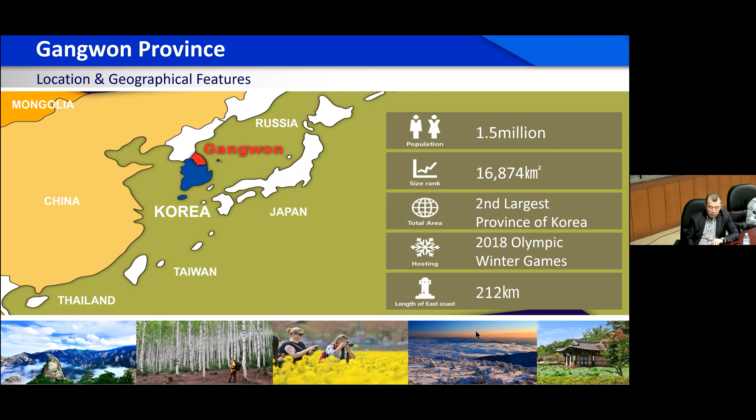Gangwon province is located in the central east region of the Korean Peninsula, where the Taebaek Mountains, which correspond to the spine of Korea, pass by, and has a long east coast. It has beautiful nature surrounded by mountains, forests, and beaches. Gangwon Technopark is a vital innovation hub in close cooperation with local governments. It aims to support local businesses and to nurture the future growth engine industry in Gangwon province, and in turn to increase employment. The Energy and Disaster Prevention Center in particular is located in this area, Samcheok, and performs hydrogen-related tasks.

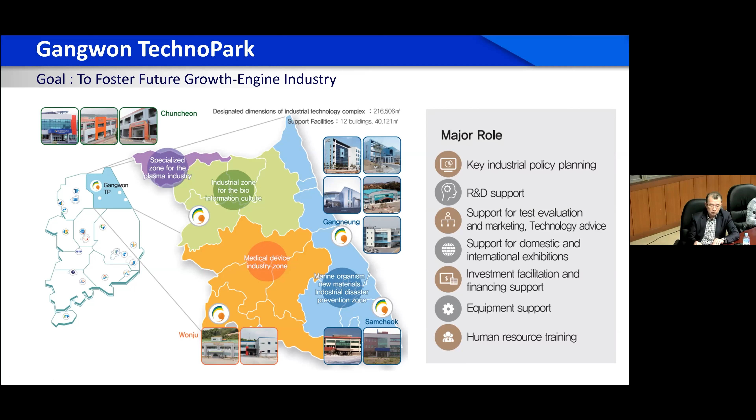First, let's talk about the regulation-free special zone. From July 2019, the Korean government has been conducting an experiment of relaxing regulation to boost new industries while minimizing the risk of side effects. Gangwon was selected as a regulation-free special zone for liquefied hydrogen in July 2020 and conducts several projects regarding liquefied hydrogen.

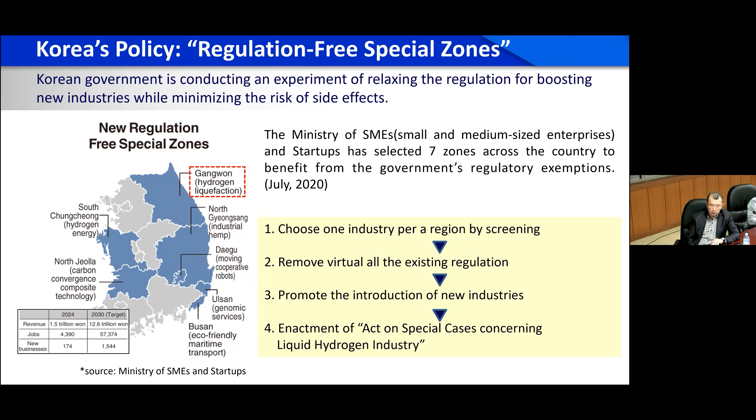In a normal environment, hydrogen exists as a gas. Then why do we use liquefied hydrogen? Because gaseous hydrogen occupies quite a large volume, it has to be compressed at very high pressure, as high as 850 bar, to decrease the volume to make it suitable for passenger vehicles, namely the hydrogen car or fuel cell electric vehicle. Here is where liquid hydrogen, or liquefied hydrogen, comes in handy. The pressure of liquefied hydrogen is only 1 bar, but the temperature is extremely low, minus 253 degrees Celsius, or 20 Kelvin. In terms of pressure, liquefied hydrogen is much safer than gas, and it can store much more mass in the same volume.

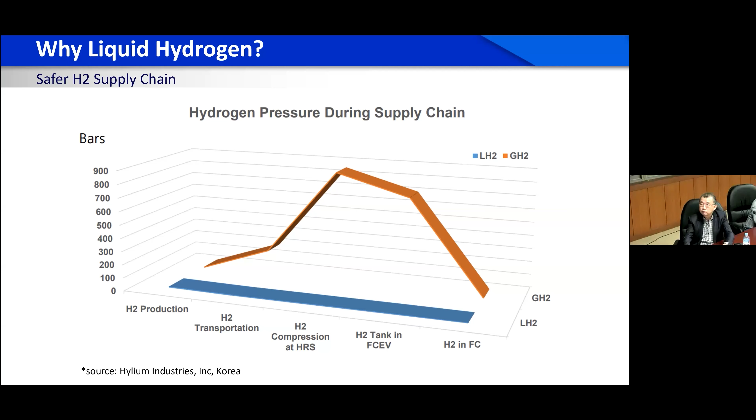How did Gangwon, or Samcheok to be more specific, become the hub of the liquefied hydrogen industry? Besides the strong will of the governor, Gangwon, especially Samcheok, has one of the major liquefied natural gas terminals in Korea. So Samcheok has a great advantage in reducing liquefaction cost by leveraging the cold energy produced by the existing LNG infrastructure. The main issue is how much power consumption can be reduced in hydrogen liquefaction plants on a commercial scale by LNG pre-cooling.

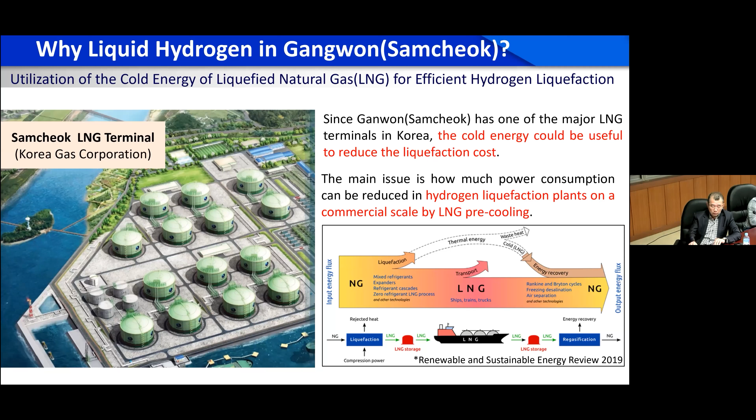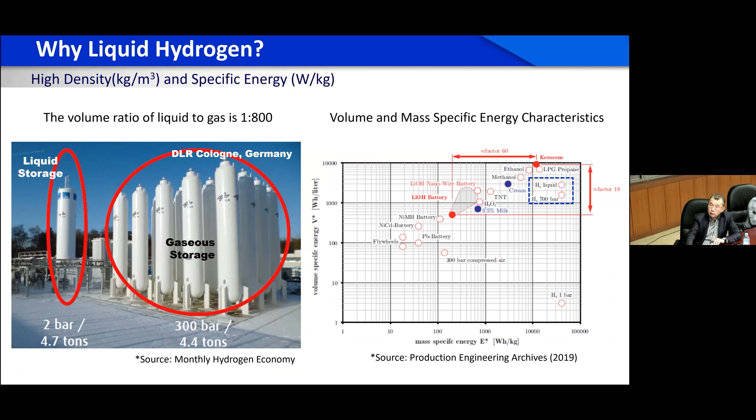As you may know, liquefied hydrogen has several advantages compared to gas hydrogen. The biggest advantage is that the specific volume of liquefied hydrogen is only 1/800th of the specific volume of gas hydrogen. This means that the area of the installation site, or charging station, or fueling station, can be reduced by 1/10, making it easier to build charging stations in downtown or city center areas. For fuel cell electric vehicles, the mileage can be increased by 10 times compared to gas hydrogen with the same storage volume. Therefore, storage and transportation costs can be reduced dramatically.

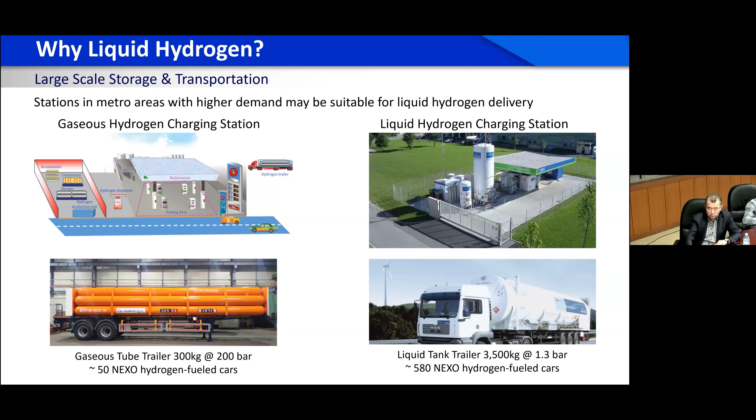Let me explain about the Liquefied Hydrogen Regulation-Free Special Zone project. This project is funded by central and local governments. The purpose of this project is to promote the liquefied hydrogen-related industries which currently lack relevant laws and safety standards.

To do business in this special zone, and only within this zone, companies are allowed to do business of production, storage, transportation, and utilization of liquefied hydrogen. Final goals of this project are to create a full cycle value chain that can produce, transport, and utilize liquefied hydrogen and apply it to mobility, ships, drones, and UAM. The most important point of this project is to demonstrate proof of commercialization of liquefied hydrogen.

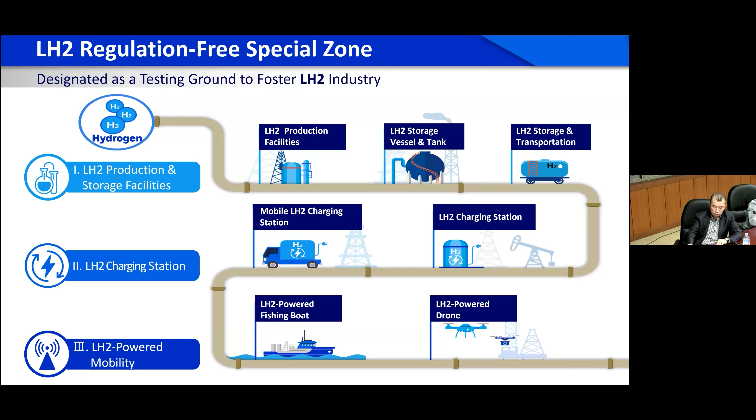Task one is commercialization or commercial demonstration of parts for liquefied hydrogen production and storage products. First detailed task is demonstration of production of pipes and valves for liquefied hydrogen. Several kinds of valves, for example, safety relief valve and check valve, and double tube for extremely low temperature applications are under development. Second detailed task is to build liquefied hydrogen containers and tanks with capacity up to 1,000 kilograms. The third detailed task is to develop liquefied hydrogen tank trailer or tanker lorry for long distance transportation and loading and unloading.

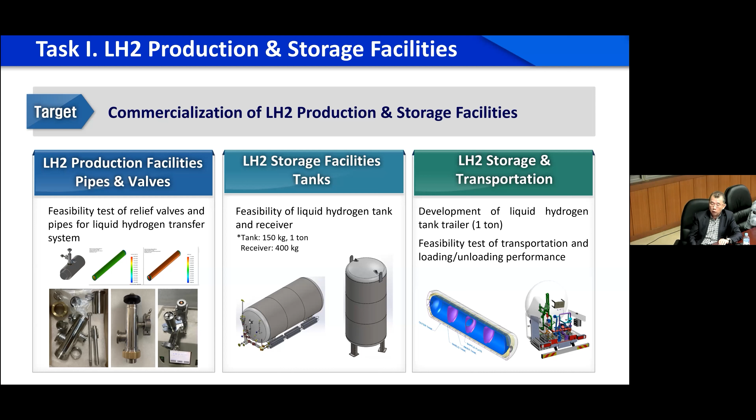Task two is commercial demonstration of liquefied hydrogen charging station. First detailed task is to build liquefied hydrogen charging stations. Here's how it works. First, hydrogen is stored on site in liquid phase. Then liquefied hydrogen is vaporized and supplied to conventional gas hydrogen filling station. For the other type, liquid hydrogen is pressurized and flows through a high pressure vaporizer and becomes high pressure gas, then charged to the vehicle.

Second detailed task is to build mobile liquefied hydrogen charging station to refuel hydrogen to ships and drones.

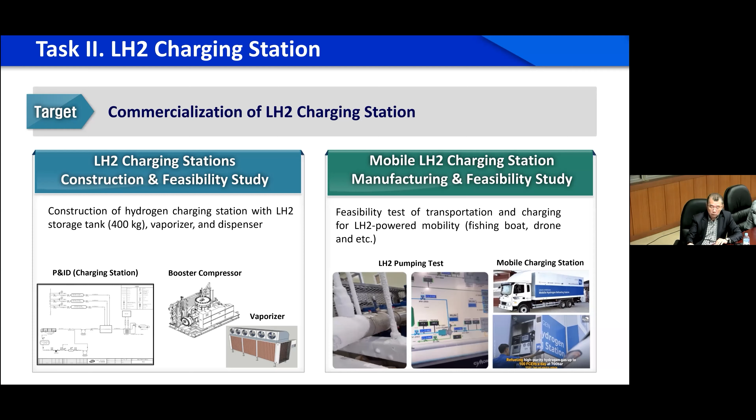Task 3 is commercialization of liquefied hydrogen-powered mobilities like fishing boats and drones for wildfire monitoring. Fishing boat with fuel cell and battery hybrid power system is under development, and we expect its first voyage early next year. Also, liquefied hydrogen-powered drones are being developed. Targets of this drone are up to 5-hour flight time and up to 25 kilograms of max take-off weight.

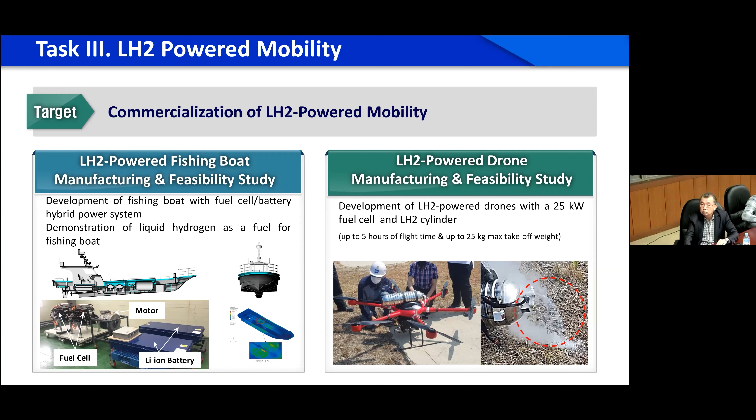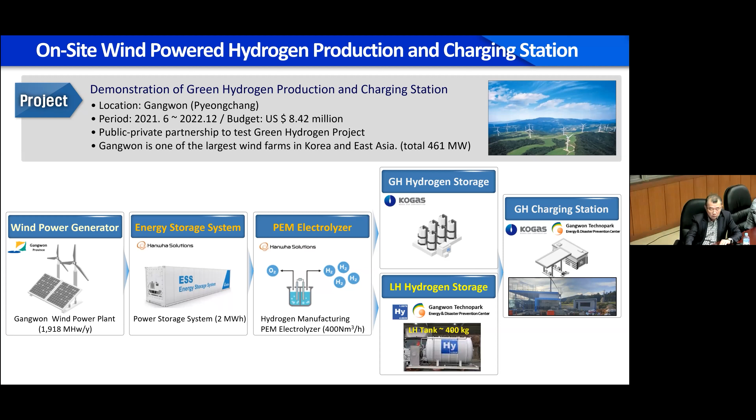Let me briefly explain some other ongoing projects. First one is green hydrogen production. We are building a hydrogen charging station with green hydrogen production facility. Hydrogen is produced by proton exchange membrane electrolyzer, and the source of electricity is a wind power generator. Second one is on-site hydrogen production and charging station. In addition to the charging station, a hydrogen liquefaction facility is built in the same site.

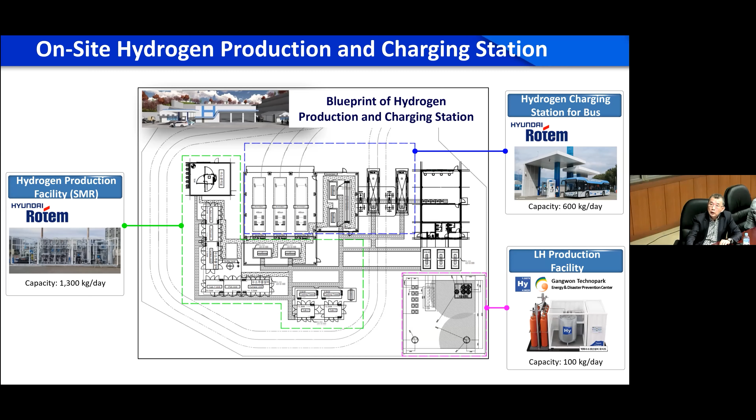So what's next? To commercialize liquefied hydrogen, we definitely need things such as safety relief valves, high pressure pumps, etc., which can be readily and reliably operated at very low cryogenic temperature. Also, international standards and internationally accredited test procedures and facilities are absolutely necessary. So the center's next plan is to become an accredited certification center and a test center for liquefied hydrogen. We are ready to collaborate with other national or international industries, institutions, and organizations.

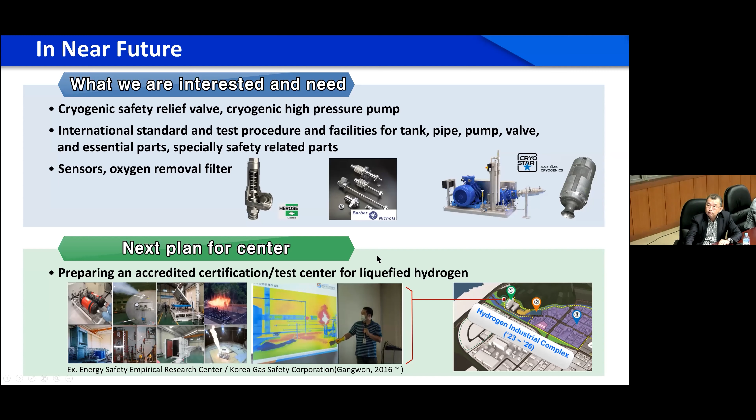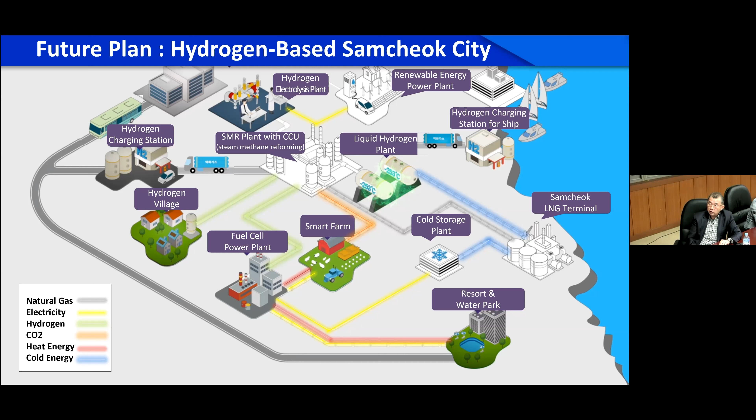This is the future plan of Samcheok. Samcheok is working very hard to be the dream come true future hydrogen city. Thank you for listening. Thank you.

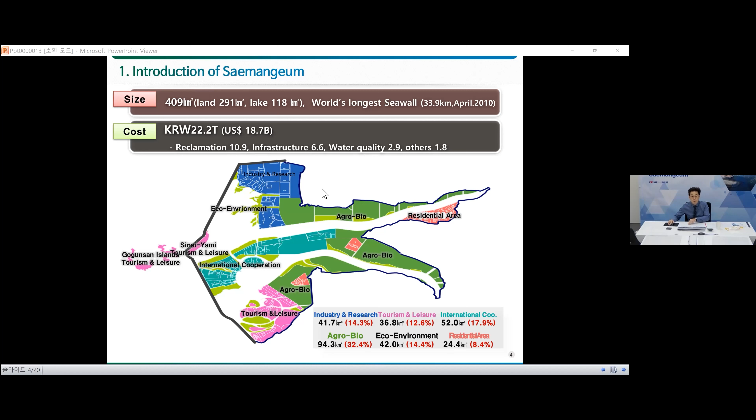Saemangeum project is divided into 3 areas. In area 1, there will be a smart green industrial complex and an airport. In area 2, a green hydrogen cluster, a seaport, and a smart waterfront city. Tourism and leisure industry will mainly occupy area 3.

SDIA, Saemangeum Development and Investment Agency, has a 7 gigawatt renewable energy plan around Saemangeum: 1.7 gigawatt by 2023, 3.6 gigawatt by 2026, and 1.5 gigawatt by 2030 will be completed.

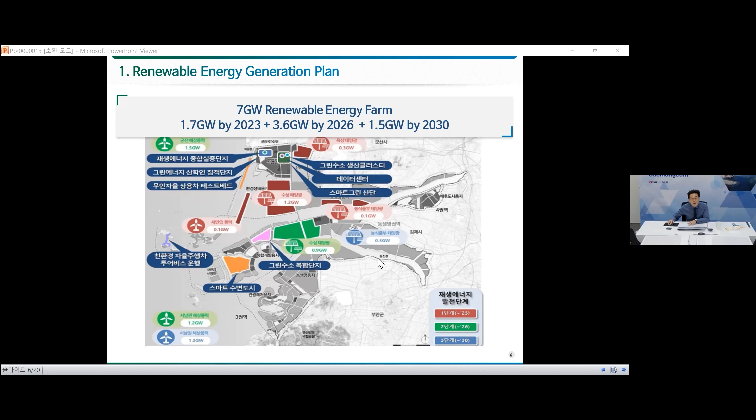Second part is about Saemangeum Green Hydrogen Cluster Plan.

Mankind needed to respond to global climate change. The energy paradigm must be changed, and green hydrogen is appearing as one of the answers. Carbon economy will give in to hydrogen economy, and carbon neutrality is a global issue now. We think we can solve the intermittency problem through hydrogen storage using renewable energy in surplus.

Green hydrogen is a milestone of hydrogen economy, and the Korean government's roadmap shows hydrogen economy. Saemangeum is the most qualified area for the roadmap. We can supply large scale renewable energy, especially solar and wind power, and we are ready to establish gigantic hydrogen infrastructure in Saemangeum.

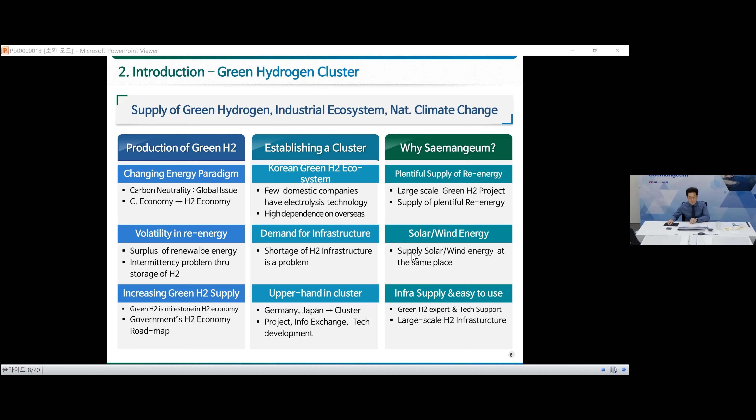Renewable energy enters into a green hydrogen cluster through a linkage system, and a 100 megawatt electrolyzer will produce green hydrogen. A 2.8 gigawatt solar farm, 1.6 gigawatt wind farm, and 2.4 gigawatt neighboring wind farm will be the source for the green hydrogen cluster. Stored hydrogen will be used for ESS, hydrogen stations, and industrial use.

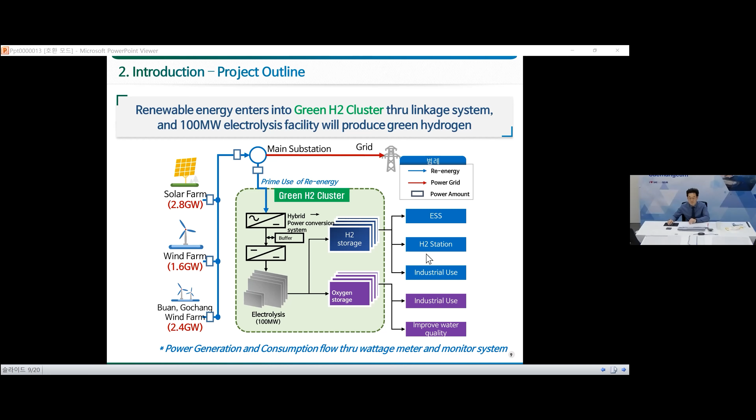A strong point of Saemangeum is a triport complex logistics system with airport, seaport, and railway. Various incentives will be given to tenant companies too.

We need to proceed with this project, solving major issues in the domestic green hydrogen industry through economy of scale, demand creation, high efficiency, and a sustainable green hydrogen industry model. The facing problem now is the high cost of green hydrogen production.

We are trying to establish the largest green hydrogen cluster in Saemangeum. We would like to realize the Korean hydrogen economy early, leading in hydrogen technology and production cost. Capacity goal is 100 megawatts, production amount 15,000 tons per year, 20 green hydrogen production companies, and 20 companies at the support center.

Saemangeum is trying to be a leading hydrogen economy cluster, hub of hydrogen production, and hub of hydrogen industry support. We have a 7 gigawatt renewable energy plant: 2.8 gigawatt solar farm, 1.6 gigawatt wind farm, 2.4 gigawatt neighboring wind farm, and 1.5 gigawatt Kunsan wind farm.

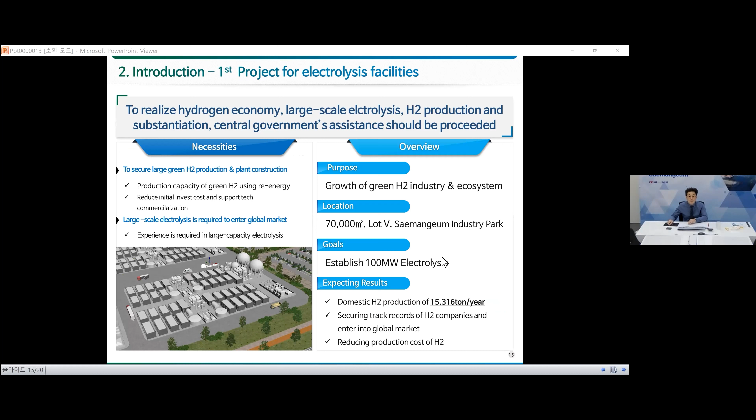To realize the hydrogen economy, large-scale electrolysis, hydrogen production, and substantiation, central government's assistance should be proceeded, including establishment of an operating organization and space for green hydrogen production, management and operation, and corporate support.

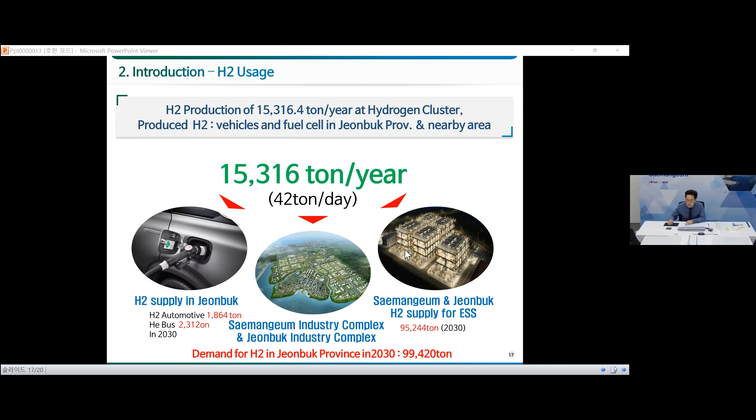About 15,000 tons of hydrogen per year is the plan from around 2027, and the produced hydrogen will be used for vehicles and fuel cells in Jeonbuk province and nearby areas.

We expect some results. Our policy goal is a low price for the production of hydrogen, and second is a reduction of CO2 for the 2050 carbon neutrality agenda in Korea. We expect economical and technical effects too.

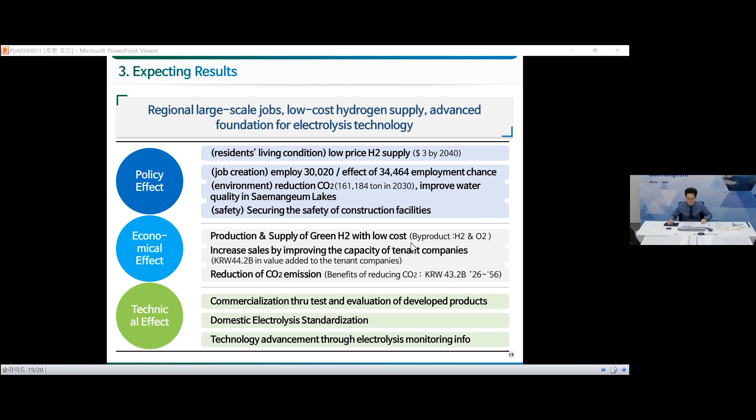Saemangeum Development and Investment Agency tries to make the Saemangeum area a Korean hub of green industry, according to Korea's carbon neutrality plan for 2050. Thank you for listening, thank you very much.